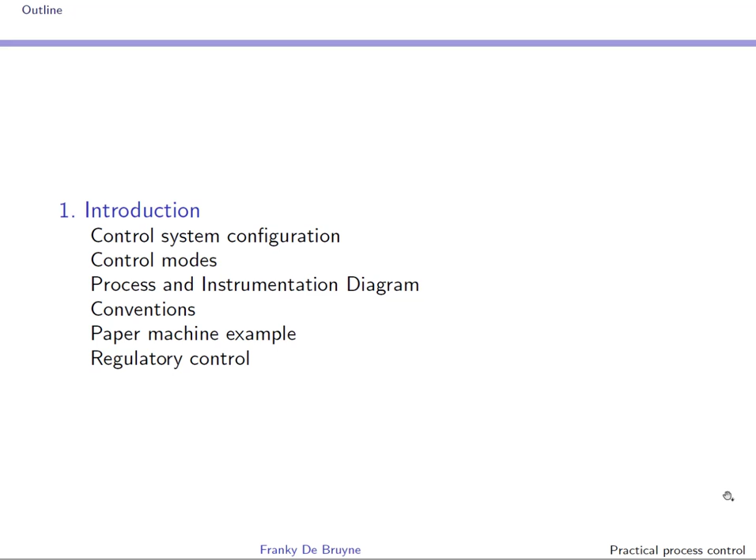In the second section, we will review some system theory. Of course, here the pace will be rather high because this material has been covered in the course Signals and Systems. Some concepts might actually be new to you. For example, the concept of internal stability and the peak sensitivity robustness margin.

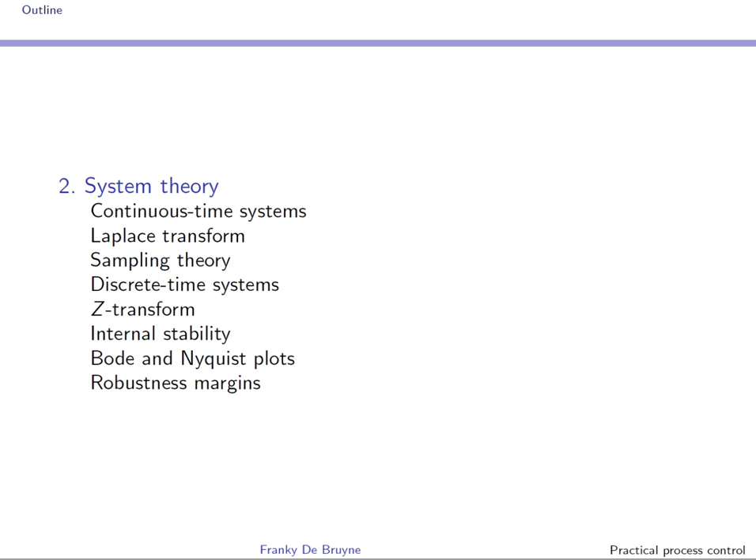The next section is dedicated to process behavior. We will start things very simply by considering the gain process, static gain, and we will gradually complexify the process. We will study these processes both in the time and the frequency domain.

Knowing the process is knowing its behavior, its interaction with other processes, the type of disturbances that are acting, input and output disturbances, the non-linearities that are present in the process, and constraints. Process knowledge has huge implications on the control structure that will be used and the type of control: PI, PID, internal model control, and so forth.

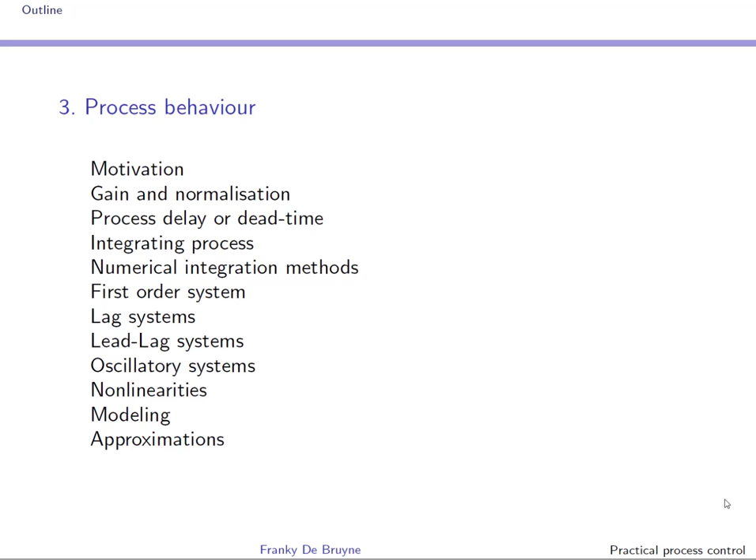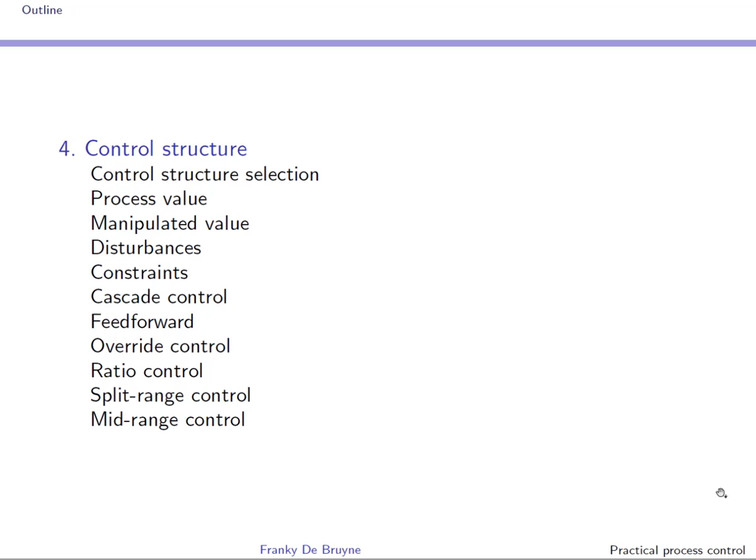In section 4, we will introduce a systematic way to construct a control structure. We'll do this for a very simple process, but given a bit of experience, you can use this procedure to design process control systems for complex production lines. The main ingredients will be cascade control, feed-forward control, override control, ratio control, split range control, and mid-range control.

Section 5 will focus on the PID controller. Notice that this section on the PID controller comes very late in the course, but this is done on purpose. Before we can tune the controller, we should understand the process and make sure that we have chosen the appropriate control structure, because we cannot compensate an inappropriate control structure by tuning. The focus in this section will lie on understanding the PID controller, and we will propose several tuning methods.

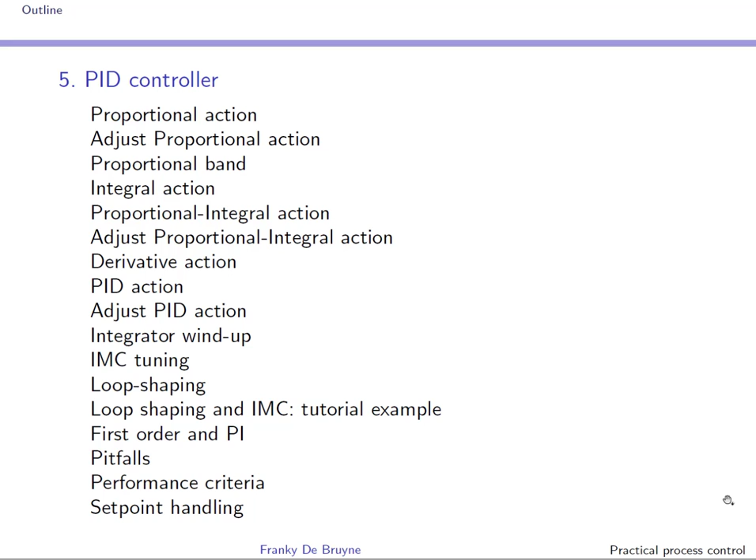We will see that choosing a controller that is not the PI or PID controller comes with certain difficulties and costs. In practice, the PID controller is therefore recycled very often. Typical examples are processes with digital MVs, processes with dead time, with complex responses such as an inverse response, for instance, nonlinear processes, and multivariable processes. This recycling of the PID controller will be the topic of section 6.

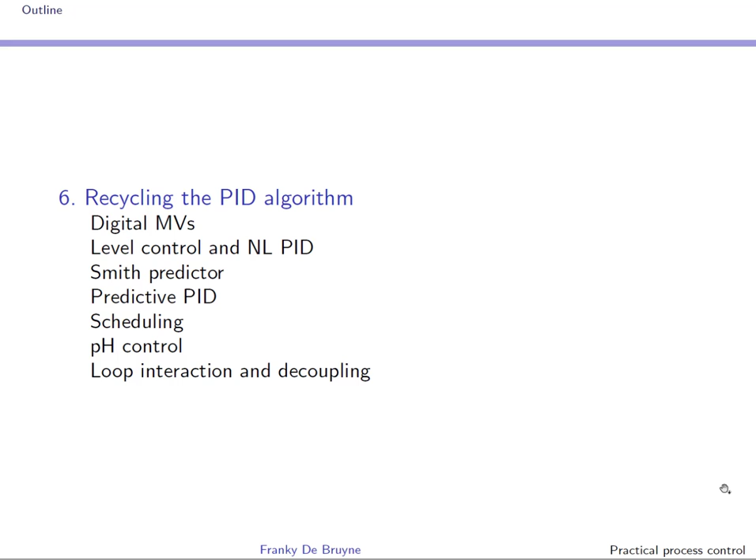In big production lines in the paper, steel, foil, food industries, PI and PID controllers are used very often. When they are not used, there is a strong possibility that an internal model controller or IMC controller is used. The IMC controller is the topic of section 7. We will construct it from scratch so that you really understand how the controller originates. We will make the link with one of the PID tuning methods of section 5.

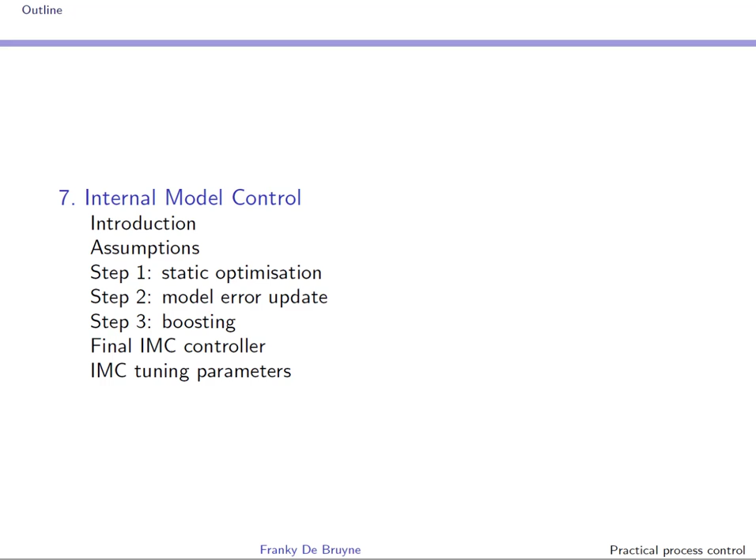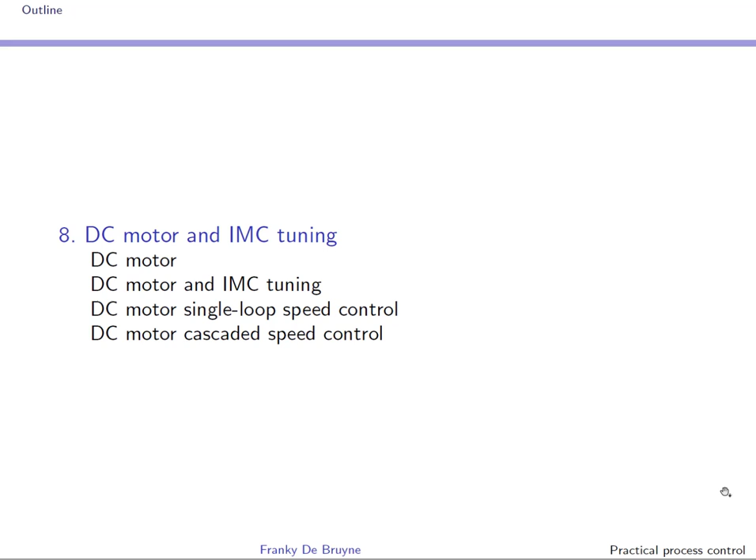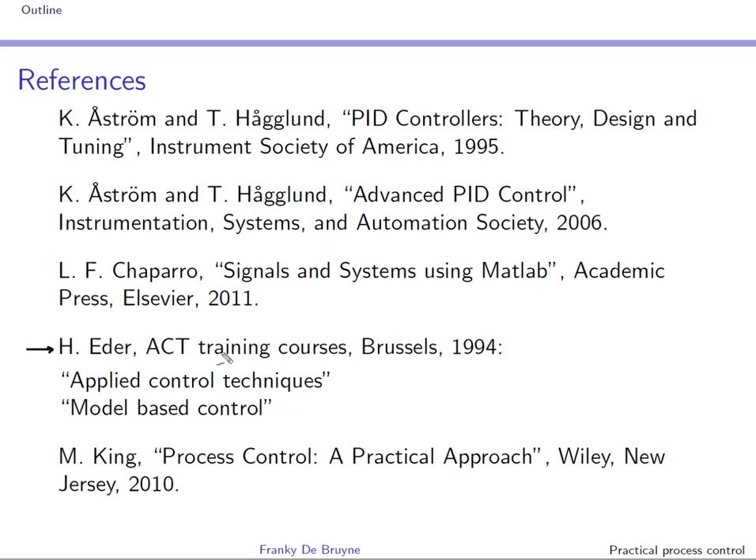The first one, applied control techniques, the second one, model-based control, that I have followed in the early 90s when I was at Siemens, and these 2 courses have most probably triggered and inspired me to teach in control theory.

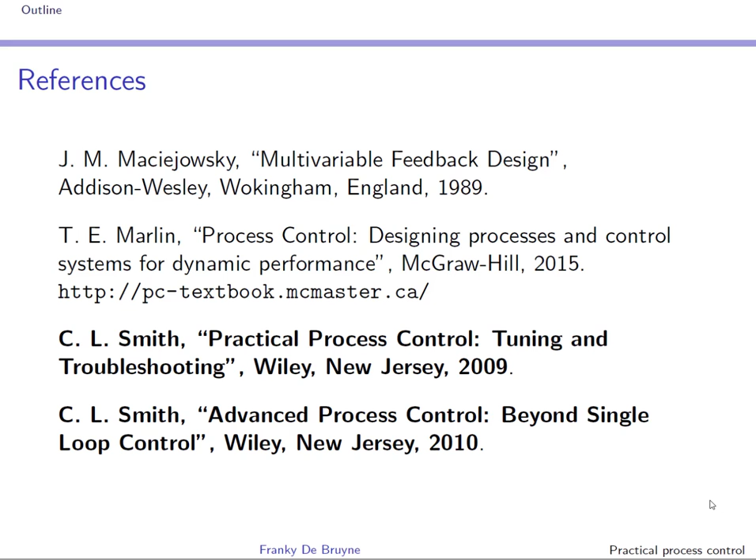The first book covers single loop control, and the second book extends the concepts beyond single loop control, as you can see. These 2 books treat process control exclusively in the time domain, and this is perfect for you if you're allergic to the Laplace transform. These books are a good help if you want to discover more and go beyond what you see in this course. Notice that I have borrowed the title of the first book to name this course: Practical Process Control.

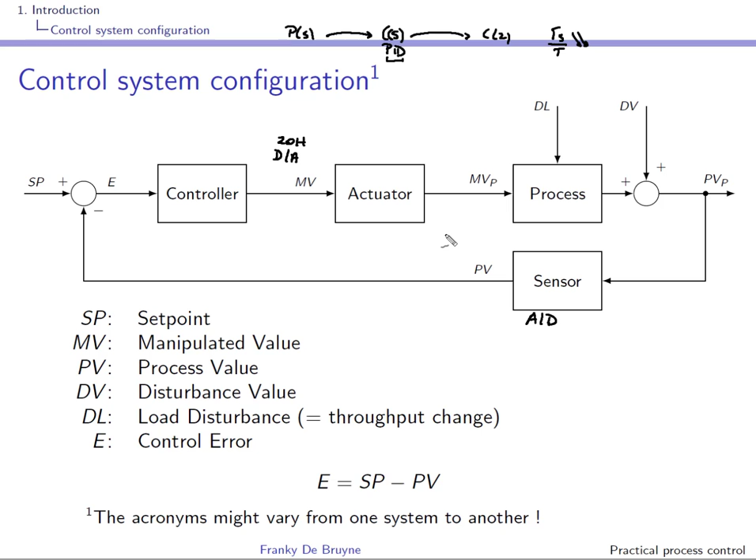So this is the control system configuration that you end up with. The process here also includes the effects coming from the actuator or the sensor.

Here the controller, in our case the controller will very often be a PI or PID controller. SP, set point, is the signal we want to track. PV is the output signal, right? It's the controlled signal. Over here you see the feedback part. E is the control error, set point minus PV, and on the basis of E, the PID control algorithm will compute an MV.

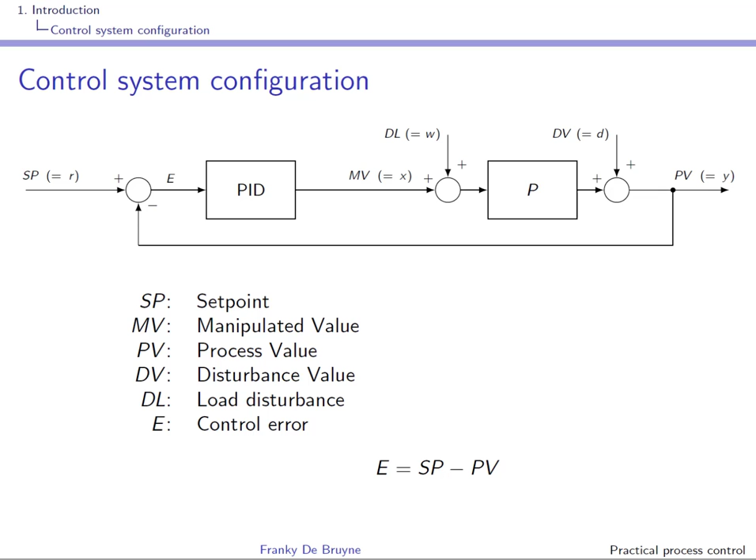There are two types of disturbances. Disturbances at the output, denoted DV, and load disturbances: disturbances at the input or disturbances on MV, denoted DL. And with the lowercase letters, you see here acronyms that are sometimes used in the course, or acronyms that refer to acronyms used in previous courses.

In practice, there are two important types of control problems: disturbance rejection problems and set point tracking problems. In a disturbance rejection problem, the set point is constant or hardly ever changes. The main goal of the controller is to reject the disturbances, the output disturbances and the load disturbances. Well, a typical example of a disturbance rejection problem is the temperature control of a room. The set point, the temperature set point, hardly ever changes, but the controller has to reject disturbances, for instance due to people coming in and out of the room and disturbances coming from the outside temperature.

Set point tracking problems are problems where the controller is designed to follow a reference or set point or trajectories as closely and as fast as possible. So for instance, the closed loop settling time is an important factor. Tracking typically occurs during operating point changes. Just-in-time production plays a more and more important role so that operating point changes occur more often, and set point tracking plays a more important role. People have a tendency to associate the controller with set point tracking, but we'll see that the disturbance rejection capabilities of the controller should not be neglected.

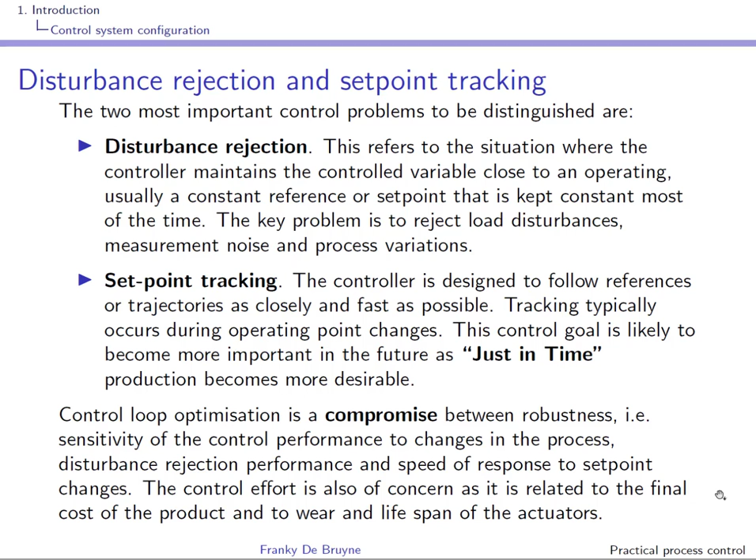Control loop optimization is the art of finding compromises between disturbance rejection performance, tracking performance, but also robustness. Robustness is the sensitivity of the control performance to changes in the process. The control effort or control energy is also of concern, as this control energy is related to the final cost of the product and to wear and lifespan of the actuators.

In this course, we will represent a system or a process by the letter P, so we'll use P of S. In previous courses we might have used H of S because we wanted to put the focus on the fact that H of S is the Laplace transform of the impulse response. In this course we'll put the focus on the fact that P here is the process. In the same fashion we'll use the letter C to denote a controller, although very often the controller that we'll tackle is of course the PID controller.

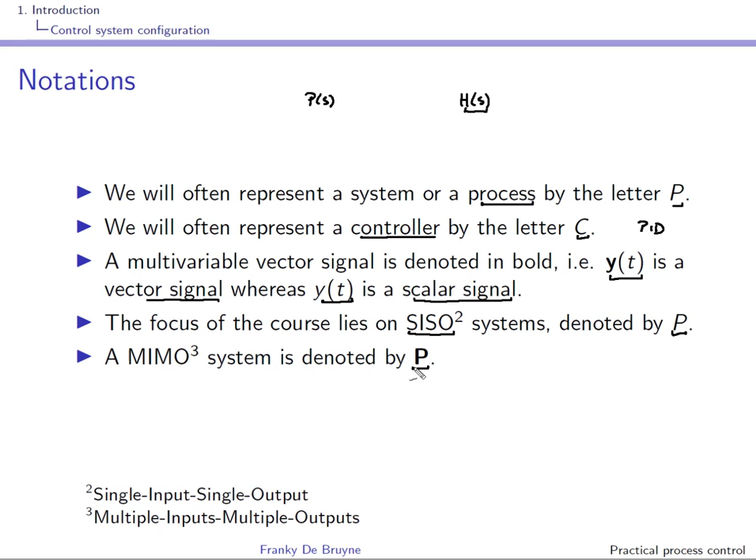A multivariable vector signal will be denoted in bold, so here y of t with the y in bold is a vector signal, whereas y of t without the bold is a scalar signal. Of course, the focus of the course lies on SISO systems, so single input, single output systems. So the process will be denoted by the letter P, as I've said before. At the end of the course, we'll speak a little bit about multivariable systems, so multiple input, multiple output systems, and there the process will be described by a P in bold.

There are several control modes associated with the controller, and as I said before, this controller will very often be simply a PI or PID controller. Well, the first choice that you have is to put this controller in automatic or in manual mode. In manual mode, the controller output MV is directly manipulated by the operator. And this can be done, for instance, by changing a value MV_man in the human-machine interface to directly influence the process input. In manual mode, the control algorithm, and very often the PID control algorithm, will be bypassed.

In automatic mode, the controller output is dictated by the control algorithm, typically, as I said, a PID control algorithm. Well, when switching from manual mode to automatic mode, the control algorithm output might be different from that of the manual output. So you have to organize a bumpless transfer from manual to automatic, and this means that the automatic output must track the manual output in manual mode in order to prevent integrator wind-up and also in order to organize this bumpless transfer.

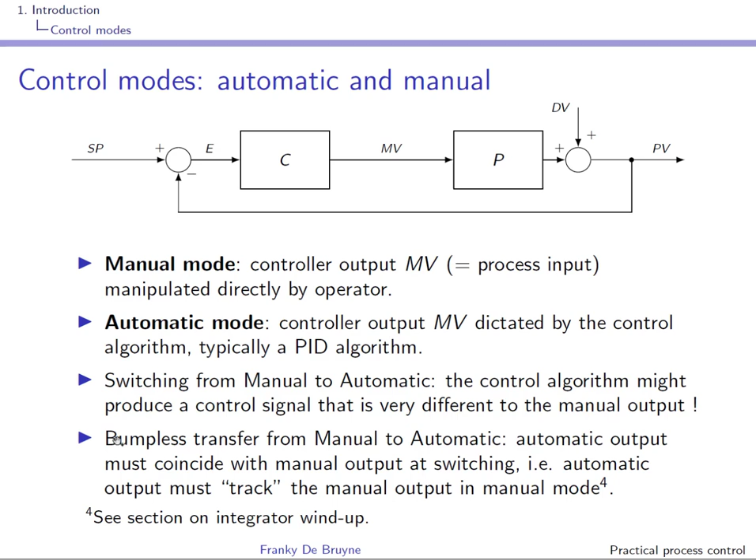We'll see this later in the section on integrator windup. When in automatic mode, it's a good idea to make sure that this manual value MV_man tracks the output of the controller MV_auto, so that when you go to manual mode, you have access here to the last available MV in automatic mode. This will ensure a bumpless transfer, and if needed, the operator can choose to change the value

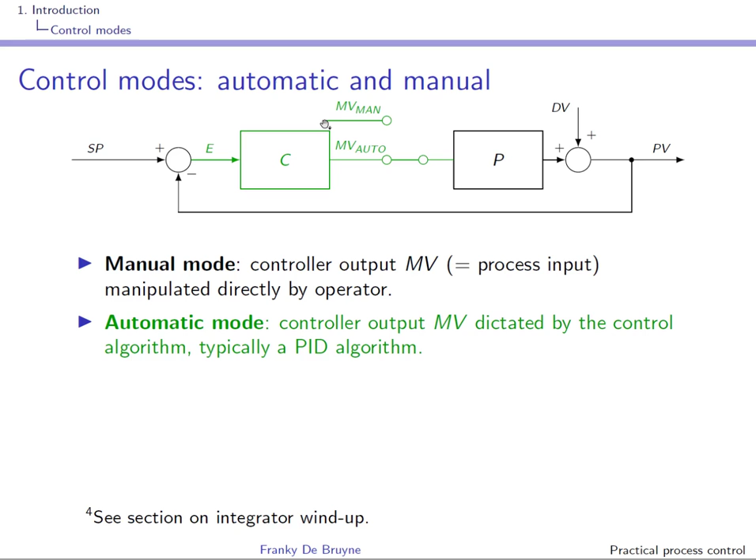MV_man. The second control mode has to do with the set point. So this control can either be in external set point mode or in internal set point mode. Sometimes you find other names such as remote set point and local set point. So external set point mode corresponds to remote set point mode, and internal set point mode corresponds to local set point mode.

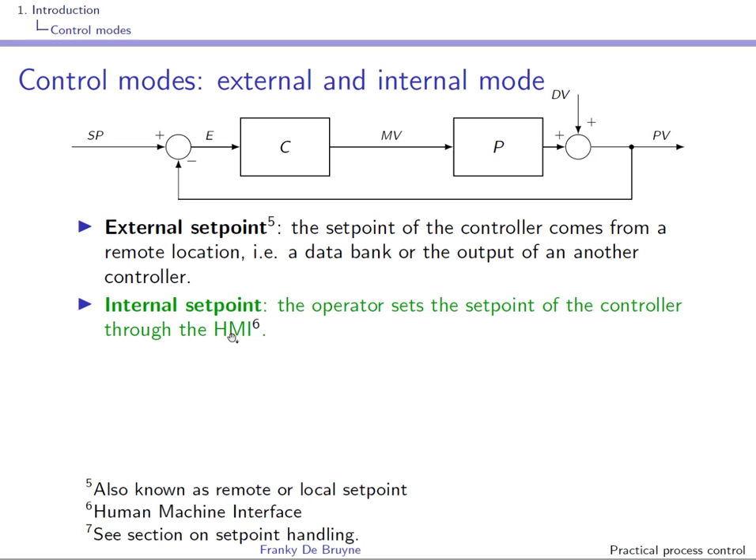In external mode, we speak about an external set point. This means that the set point of the controller comes from a remote location, from something that is external to the system. For instance, a data bank or the output of another controller, and this is the case, for instance, in a cascade. In internal mode, we speak about an internal set point or a local set point. The operator sets the set point of the controller directly through the human-machine interface.

Again, there might be problems when switching from one mode to another. So for instance, from external set point mode to internal set point mode. We have to organize a bumpless transfer from external to internal set point. So when you're in external set point mode, the internal set point must follow the external set point, so that when you go to internal mode, the internal set point coincides with the last external set point.

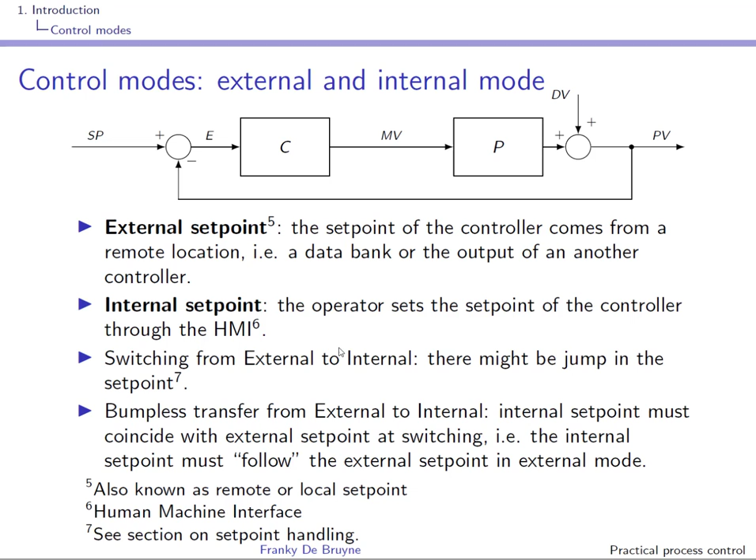There might also be problems when switching from internal set point mode to external set point mode, for instance in a cascade. When in internal mode, the external set point should be chosen appropriately, and this will be discussed in the section on cascade control.

The third control mode is the output tracking mode or interlock mode. When this binary signal here, track on, is set to 1, then the controller output MV will track the value here, track val. This is a signal that can be chosen by the one that is programming the control algorithm. When track on is set to 1, the control algorithm is inactive, and as I've said, MV is equal to

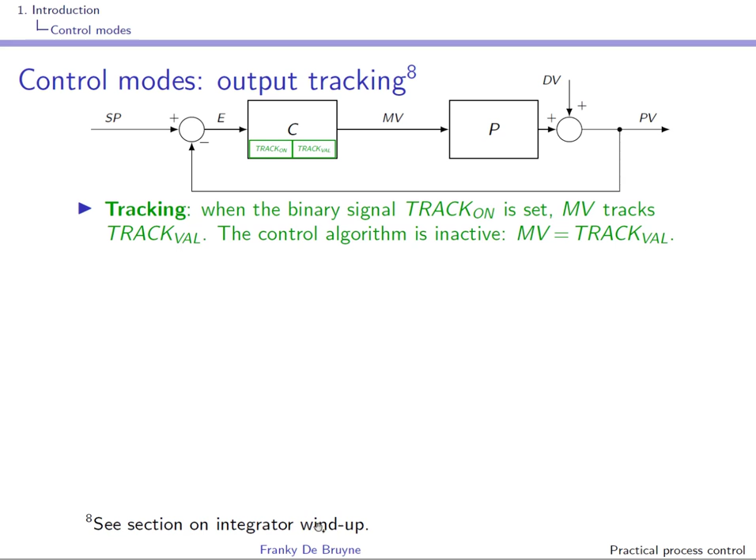track val. I said that the control algorithm is inactive, but this has to be done in the proper way in order to prevent integrator windup. We'll see this later in the section devoted to integrator windup, in which we implement a controller that has this output tracking mode or interlock mode.

An example of output tracking is the following. Assume here that there is a measurement PV that comes from a sensor, and that this sensor provides a binary flag to tell you if the measurement is okay or not. So if PV nok here is 1, this means that the measurement is not valid. Well, if this sensor is giving you this flag, PV nok equal to 1, this means that the process value measurement is no longer valid, and of course you cannot use it for control.

So what you should do is freeze the controller. This can be done as follows. You connect the PV nok signal flag coming from the sensor to track on, and you connect MV, the output of the controller, to track val. What will happen when the sensor flags a measurement that is wrong? Well, this one will go to 1 and MV will track itself, so that you have here at the output the last value that you had in automatic mode. Okay, so the controller is frozen with the last active value of MV.

The controller is locked, and of course in the human-machine interface there should be a warning for the operator to tell him that there is something wrong with the measurement, but at least nothing goes wrong in the sense that the controller is now locked.

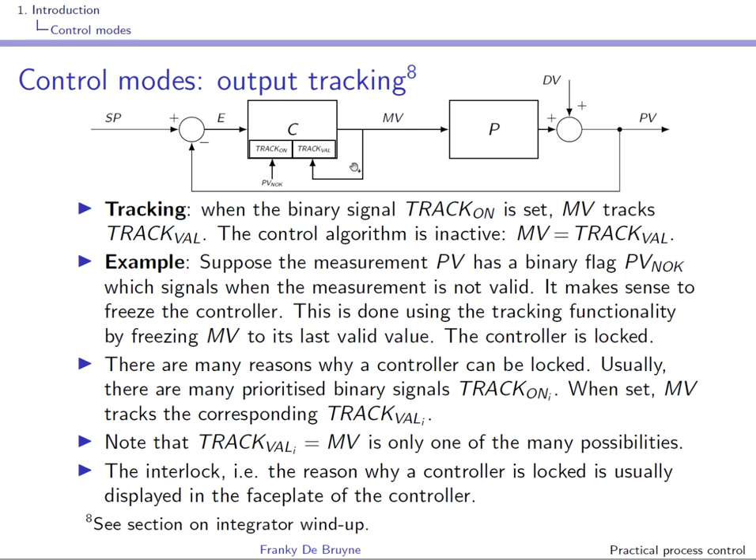Usually the reason why a controller is locked is displayed in the faceplate of the controller in the human-machine interface. As you can see over here, track val is equal to MV, but this is only one of the many possibilities, as we will see later in the course when we consider cascade control and output tracking in that particular case.

I will now introduce the Siemens Simatic PCS7 system. You will find more information about it on the net, and this PCS7 DCS system can be used to automate one or several large production lines. What I will do is use a version 8, so a slightly older version than the version 9 that is now available, to illustrate some of the concepts of the course. I will start by illustrating the different controller modes that I've just talked about.

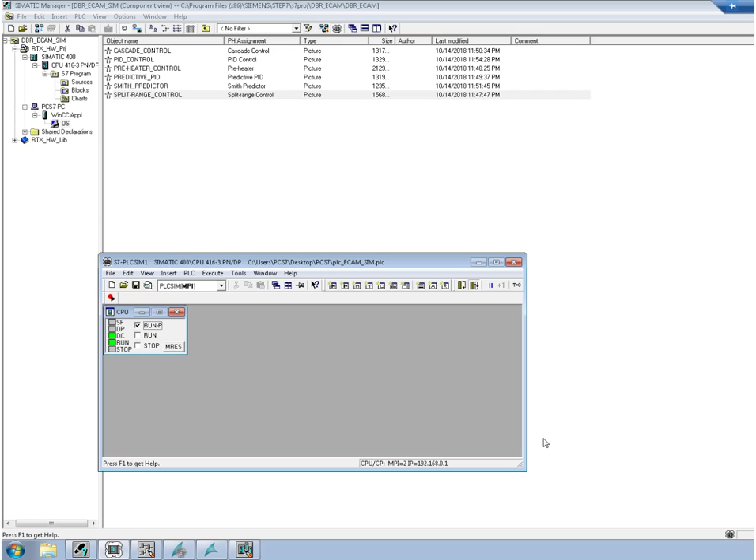What you see over here is the Simatic Manager. It allows you to interact with the PCS7 system, with the actual process, with the controller, and with the human-machine interface. What we will do here is use S7 PLCsim to actually emulate a PLC, and what we'll do is kind of program or model the system and design a controller for it and a human-machine interface in Siemens WinCC. I will now briefly show you what the different components are of the Simatic Manager.

Well, first of all, what you can do is introduce the hardware configuration. So you have to choose the CPU, right? Here we are working in simulation, so I've just added a CPU. In reality, of course, you'll have to interact with the system, so there might be several CPUs, and of course there will be I/O, so you'll have to choose some of these cards: analog input cards, analog output cards, digital in and digital output cards. Once you have done this properly and you have compiled things and downloaded to the relevant CPUs, well, you can interact with the actual system.

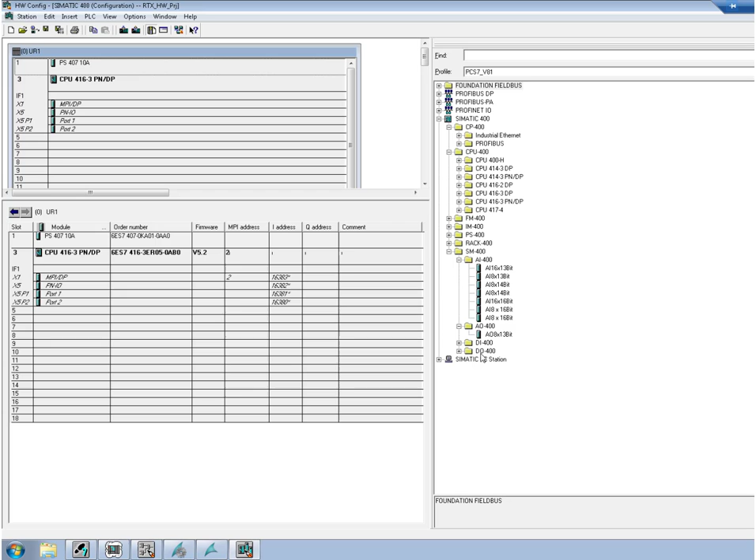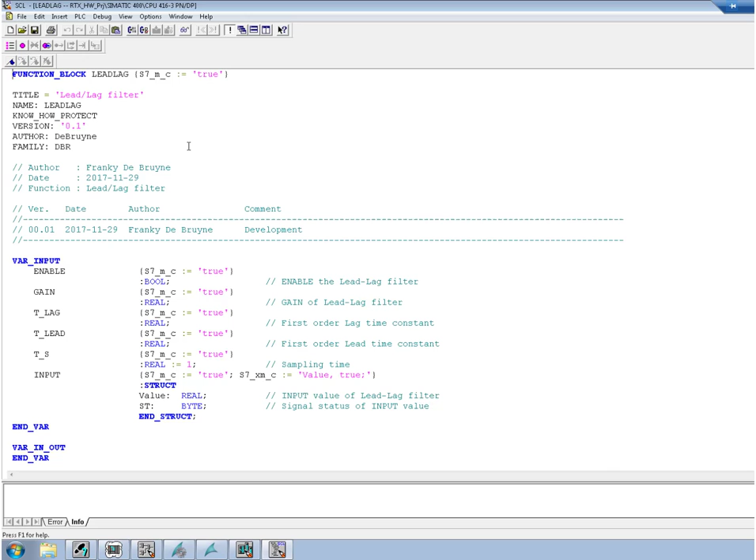In this section you will find everything that has to do with the programming. Here is the source container. If we have a look, for instance, you will find over here the source code to implement a lead lag system using SCL code. This is a Siemens language called structured control language. We'll come back to that later in the section dedicated to process behavior.

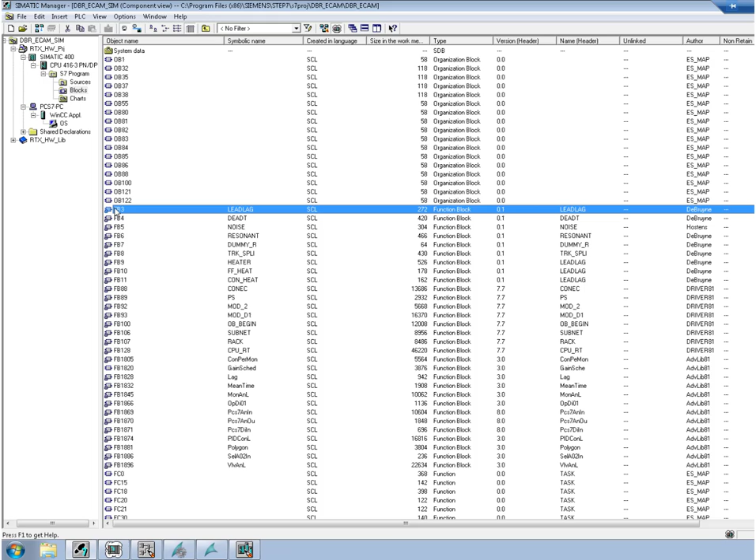Over here you have the block container with the FBs, so function blocks. They have instance DBs, FCs, just functions, and then DBs, data blocks. This looks very similar to what you've seen in other courses, but probably on a system coming from another vendor. What you will see over here is the function block lead lag that will implement the lead lag system, and it has resulted from the compilation of the code that I've just shown you before.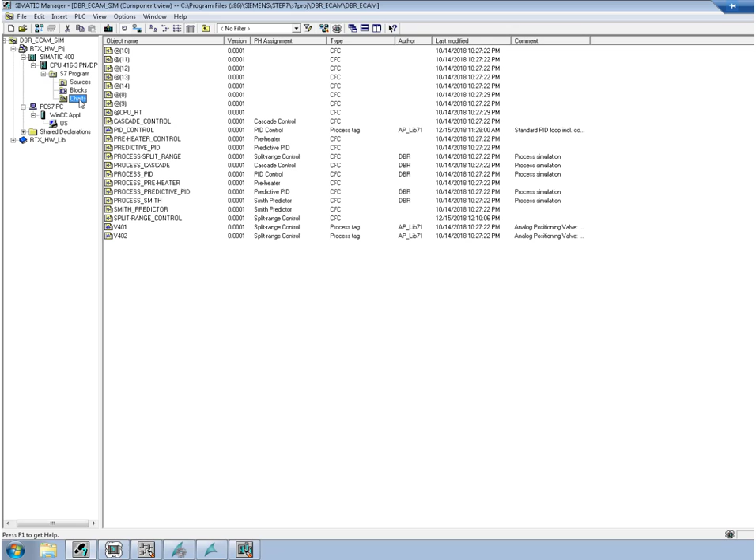Here you have the CFC chart folder. CFC stands for continuous function chart, and CFC is a graph editor that allows you to program the entire control software. Well, let us open a few charts. What you see over here is a chart that allows you to implement a process. Remember here that we use PLCsim, so we do not have any actual system. So what we'll do is simulate the system, emulate the system, and you can see that you can do this very easily using this graphical editor.

So this is a dead time, and this is this lead lag block FB3 that has resulted from the compilation of the SCL code that I've shown you. As you can see over here, we can construct a simulated process using a dead time, several lead lag systems, a resonant part, and some noise. These blocks are running with a certain sampling interval, but we'll come back to that later.

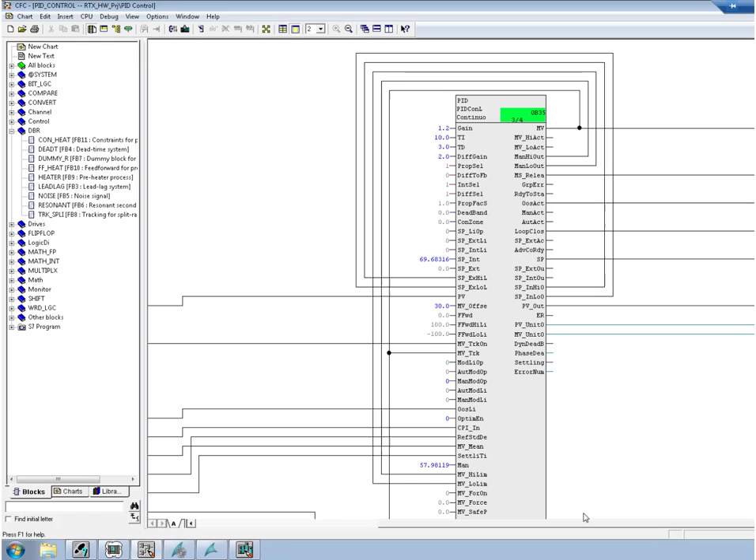We can have a quick look at the PID controller just to give you an idea of the type of block that is used in PCS7. It's much more than a block with simply a few inputs and a few outputs, but this will become clear later in this course.

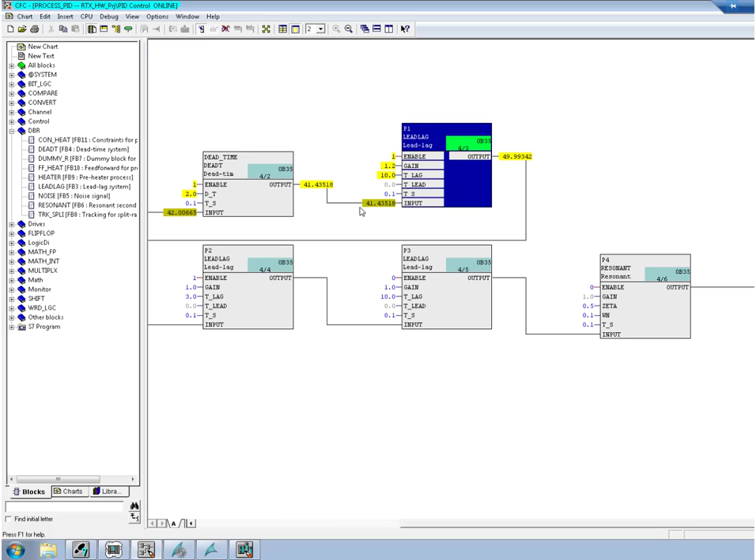Once the program has been compiled and downloaded, I will not do it right now, you can interact with the system directly in CFC and see the different variables. So for instance, this is my lead lag system, and here you see the input and the output.

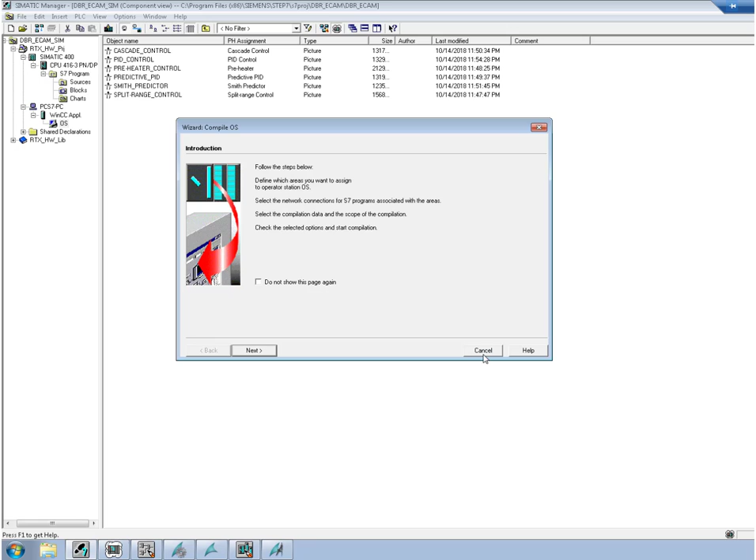Instead of interacting with the system using a CFC, what you can do is also design your human machine interface, and for Siemens this is done using WinCC, so the Windows Control Center. So what you can do is compile everything so that the variables become available in the WinCC Control Center, and what you can then do is design pictures of the type that you see over here to generate a nice human machine interface. So we will stop this because this will take too much time.

We can have a look at one of these images, for instance this one. Here you can design your interface with the actual system, so the human machine interface. Here with Siemens it's done using the graphics designer that is associated to the Windows Control Center WinCC. Very often what is done is that there is a drawing of the P&ID so that the operator can see where he is interacting with the system, and usually faceplates are used, I will show you later, to interact, for instance, with the PID controllers.

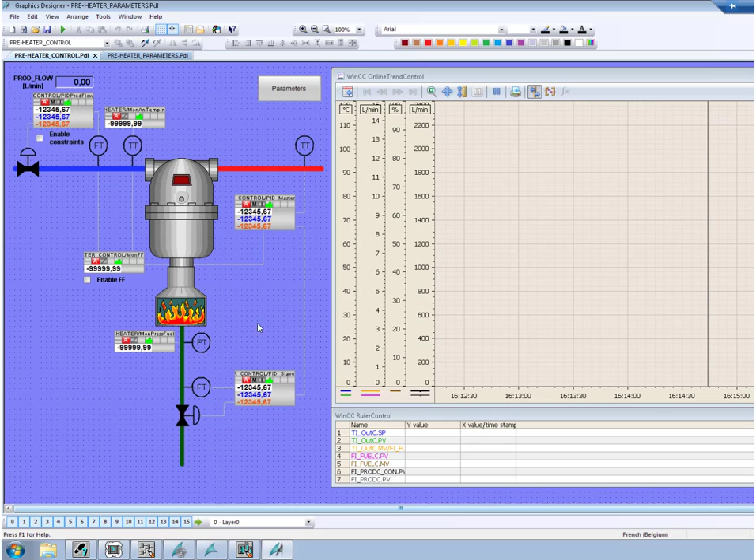There are curves and there are possibilities to interact with certain parameters, and if I go and have a look at the properties of this one, you will see here that there is a link with a variable that has been obtained using this compilation procedure. This is how you make the link with what is happening in the actual PLC.

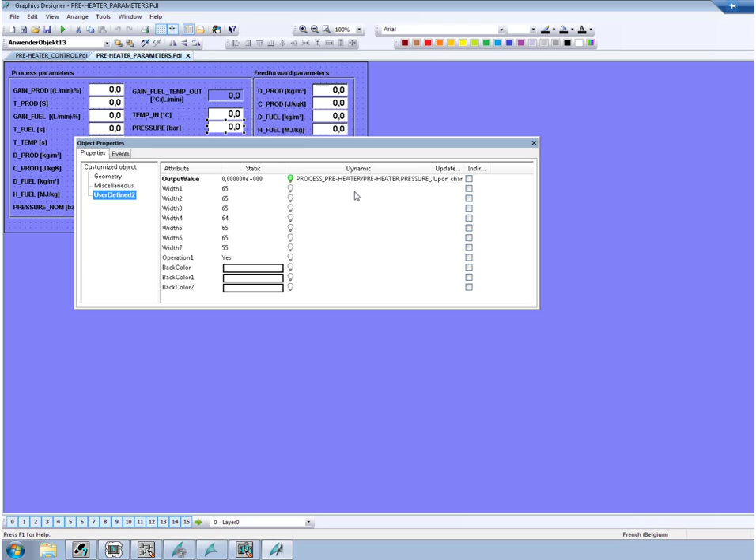So this is how it looks like in real life in the human machine interface. So here, Windows Control Center. This is for the preheater example that we'll treat later on in the course, so I will not go too much into details, but you can see here the trends. You can interact with the system, so I can, for instance, change the set point.

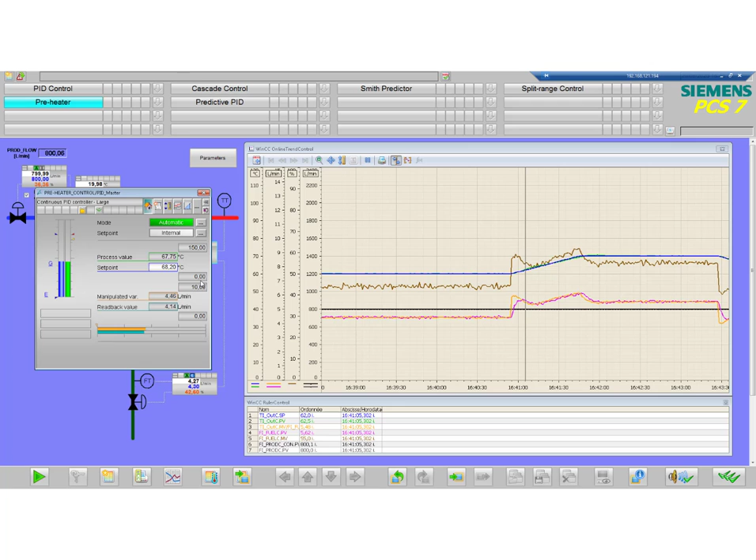So you can see that the set point is increasing. Here there is a ramp on the set point, so it does not increase directly, but you will see that it will stabilize at 60, and you can have a look at the parameters. We will not go into the details of this system for the moment. This is for later. What I want to illustrate are the controller modes that we have talked about previously.

So this is the CFC interface with the process that we have programmed. So in this way we can change the emulated process. In this case it has a dead time of 2 seconds. There are two first order systems, as you can see, because here the lead time constants are 0. We'll come back to that later. The first order system has a time constant of 10 seconds and the second one of 3 seconds, and we have added some noise.

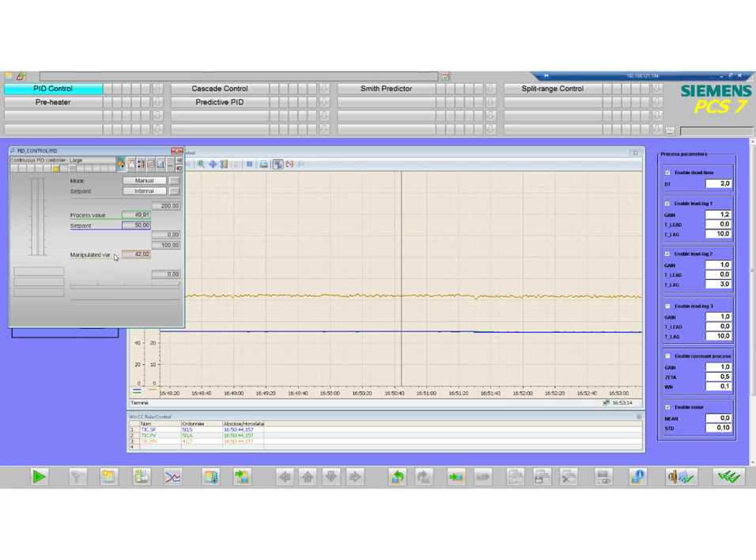Here we can interact with the process, with the controller, using this interface, and as you can see here, this controller is in automatic mode and internal set point. So this means that since we are in internal set point, the operator, in this case me, can change the set point locally. So we can, for instance, change the set point to 60%. Well, degrees here because it's a temperature controller.

As you can see here, in blue you have the set point, in green the process value, and here in brown the output of the controller. So what you can do also to illustrate here the concept of automatic and manual mode is go to manual mode. Observe here that the manipulated value MV is fluctuating.

When the controller will go to manual mode, the last active value in automatic mode will be selected and we will have a bumpless transfer. This is illustrated now. As you can see, the value is fixed to its last automatic value. I am in manual mode and I can change the manual value.

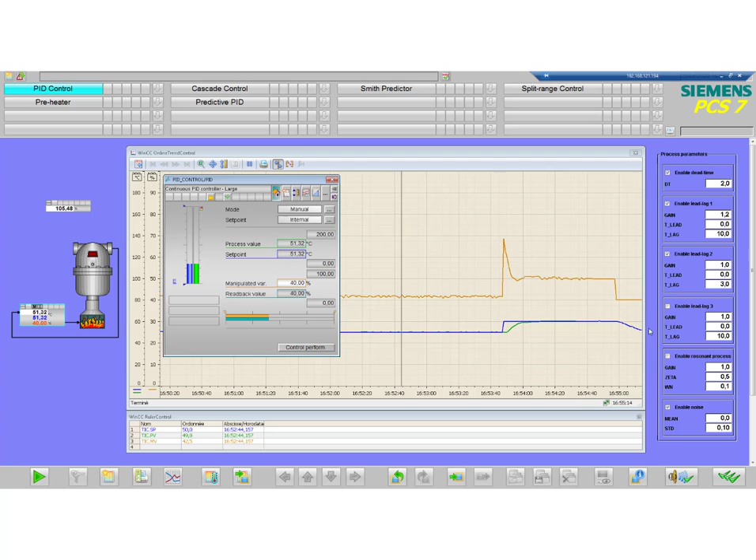So now I'm interacting directly with the process because I am imposing the input of the process. So I have just changed the manual value to 40%, and as you can see, the system is interacting with that. So I hope with this that you see the difference between automatic mode and manual mode.

Well, in order to illustrate the concepts of internal mode and external mode and output tracking, I'm going to use another system here, and it's a cascade system. I will not go too much into the details because this process will be used when I will be talking about cascade control. But it suffices to say here that you have an outer loop and an inner loop, or a master loop here and a slave loop.

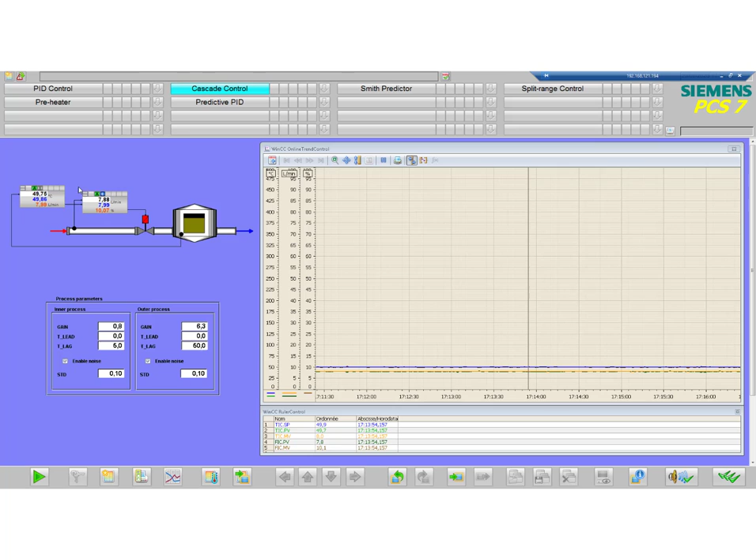Okay, so the master loop is controlling the temperature over here, and it is setting the flow of fuel here, and the fuel flow is controlled using this slave controller by acting on the control valve over here. So let's open the two control faceplates. So as you can see here, I have the master and here I have the slave, right?

And you can see here that the slave controller is in external mode. It is impossible to change by clicking over here the set point of this controller, because this slave controller receives the set point from the master controller. You can see it over here. The manipulated value of the master controller is the set point of the slave controller.

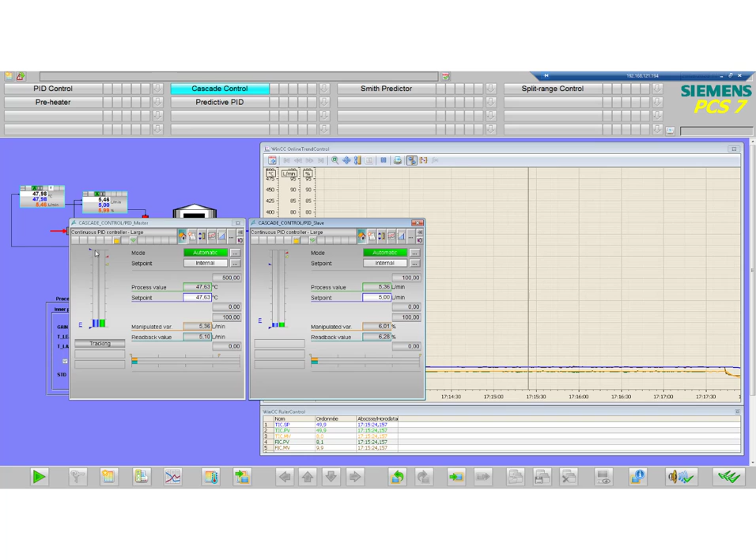So what we can do now is change and go to internal set point mode, and you will see here that the set point will change color, and it is also possible now to go, for instance, to a set point of 5 liters per minute. Okay, so we are in internal set point. So this means now that the link between the manipulated value of this controller and the set point of this controller has been broken.

Okay, we will see when we talk about cascade control that you have to do something about this controller. If you do nothing, you will see that there will be windup of the integral action. So what you will have to do is make sure that this controller goes into tracking mode or interlock mode, and you can see that it has done this. You can see here tracking mode and the T appearing here.

Okay, so the PID control algorithm has become inactive, and the output of the controller is actually, in this case here, the process value of this one. We will see this later. You can see here that the manipulated value is now tracking the process value, and this one is in tracking mode.

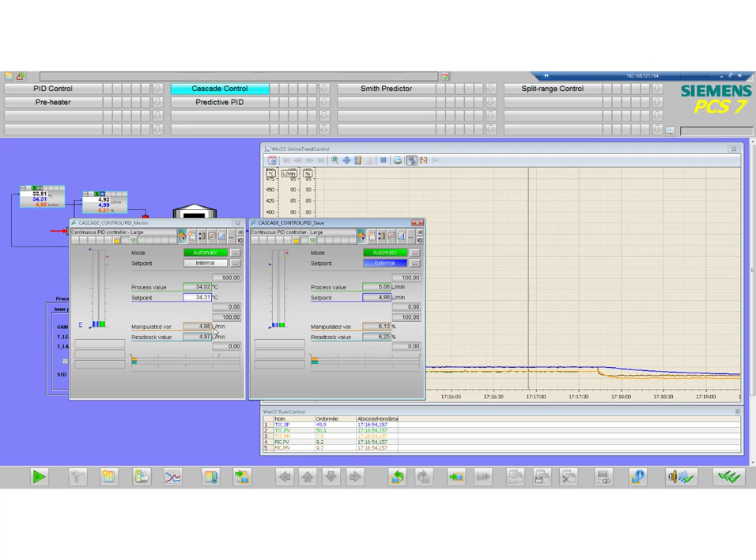If I go to external mode again, right, this controller will be acting again as a controller, and you will see here that this tracking will be disappearing. Again, here we have this cascade control that is active, and what you see over here is indeed again the set point.

Well, using this faceplate that you've seen before, it is possible to interact with the PID controller, here a temperature PID controller. There are similar faceplates for control valves and for motors. If we click on the faceplate, this is what you obtain, and this part you have already seen, but you can also of course change the control parameters. Okay, so the parameters of the PID, so this is the PID control gain, the integral time constant and the derivative time constant. We'll come back to that later.

You can also set limits, right? And if PV goes outside these limits, an alarm is generated. Here all limits have been deactivated except a warning and an alarm on the maximum value of PV. As you can see now, the process value is at 60. So if we, for instance, put a warning level of 40 degrees, we should obtain an alarm. As you can see over here, it's clearly shown that the PV of this controller has exceeded the warning limit.

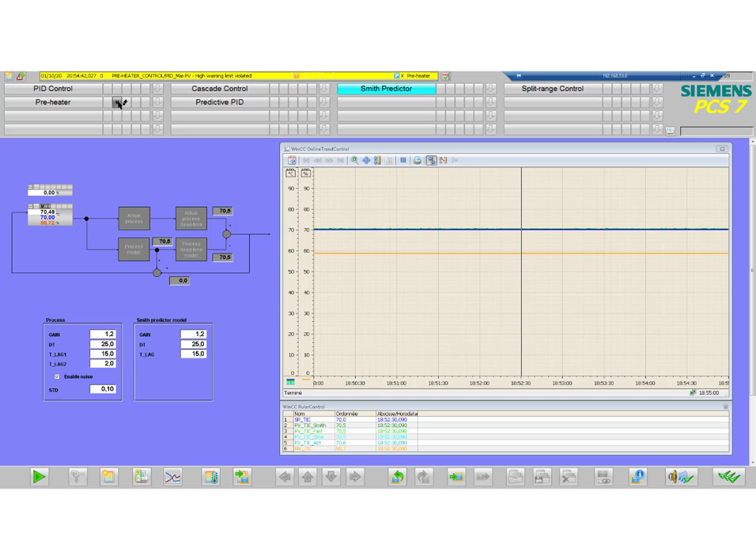Assume now that the operator is looking at some other part of the process. It is clear from this warning that there is a problem, and he can click and see where the problem is coming from. Of course, then he has to do something about this problem. For us it's rather easy. We put the old value and the problem is solved. In reality, of course, things will become a little bit more difficult, and then he can quit the alarm.

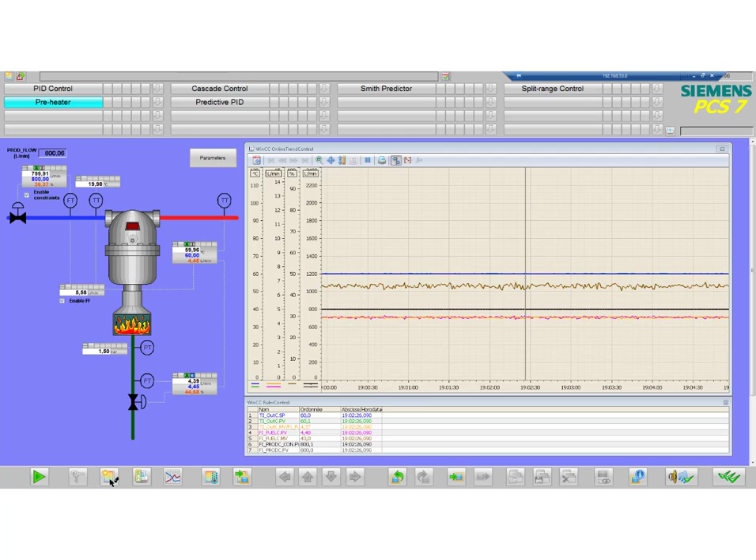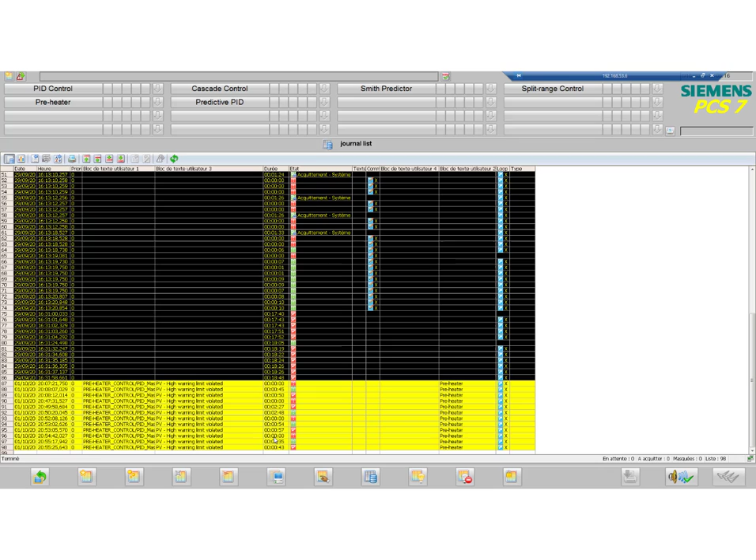It is possible to consult the list of previous alarms, and this is what you obtain. Of course, here there is only one type of alarm, but you can see that this high warning limit violation has occurred several times. The last time that it has occurred, it was active for 35 seconds and it was quitted after 43 seconds.